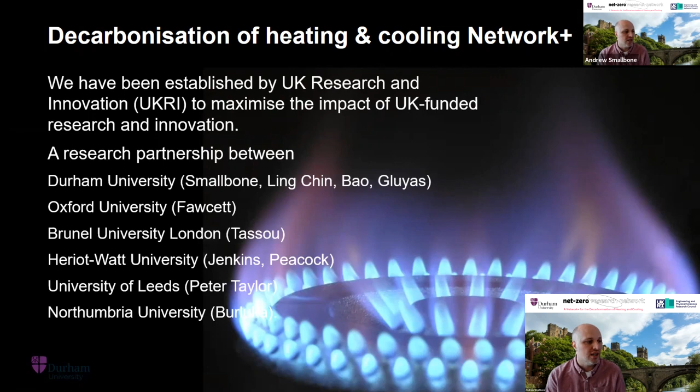Okay, so this Network Plus is a partnership which has been established across Durham, Oxford, Brunel, Heriot-Watt, Leeds and Northumbria. And we were established initially with these set of partners, but this is just how we've started. We built on top of a pre-existing thermal energy network and are planning to continue to grow this and bring more people on board as partners.

It's got key objectives for the network. The first one is to grow a world-leading research network around the topic of thermal energy, so that we can all communicate together and let each other know what's happening. This is obviously a very timely topic at the moment. It's a big challenge. It's going to cut across residential, business, industry. It's going to be net zero relevant. So of course, lots of opportunities to be involved in a network which is going to be rapidly changing.

The plan is to try and bring together lots of the different stakeholders across the technology, across end users and social scientists and policymakers. And we plan to do that through sandpits, workshops, the possibility of doing secondments, research studies and public engagement. And then of course, the key is to try and get people from each one of those sectors to work together on different key cross-cutting challenges, and we'll try and do that through some of our flexibility funding, which we will announce how to get hold of in the near term.

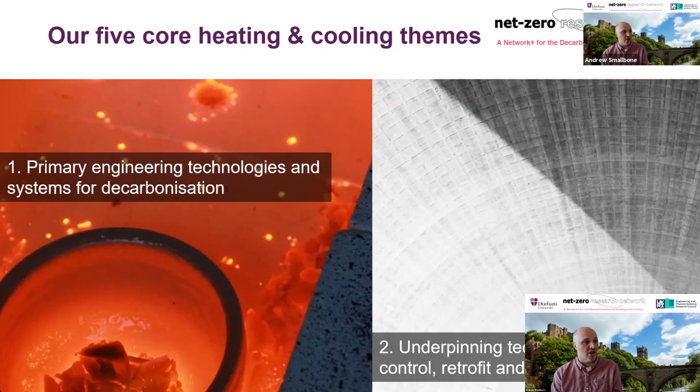We have set aside 5 core themes that the network works around. The first is about the core technologies that deliver heating and cooling, your heat pumps, etc., or gas boilers, and the key technologies and their surrounding systems for decarbonisation. And then number 2 there is the actual underpinning technologies, materials, control, retrofit, and infrastructure. So that would be potentially the equipment or the materials that underpin the primary energy technologies.

At a high level, we've got what's happening with the wider energy system. Obviously, that's got a key element related to economics. So economics is obviously a key part of that too. And then 4 and 5 there show the relation of the technology back to people, and how do you shape the future world in a policy and a leadership setting in order that we can transition to net zero with as little pain as possible.

In terms of the practical element of the Network Plus, we're planning to have activity around 4 key areas. The first one is co-organized events, and that's one of these events right now. And we plan to have many of these over the 4 years. We've been doing most of them online to date, but hopefully transitioning to real world in the near term.

We have a budget for secondments, so taking an academic and getting them to work in industry for a while to solve problems in and around this challenge, and also travel bursaries to support early career researchers to travel to our events and activities. And as I mentioned, we've got some budget for multidisciplinary research feasibility projects.

And there's also a role in and around roadmap development to try and explain what the key technologies in this sector are and how they are evolving, and to try and communicate that to a wider audience who are now taking an increasing interest in this particular area.

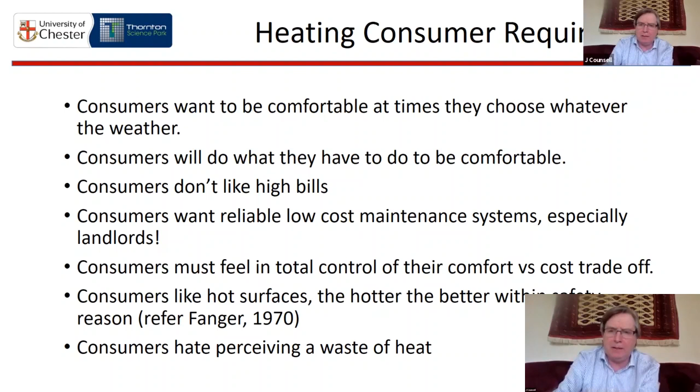Whatever we say or whatever we try to tell consumers that it's more efficient to sometimes waste heat, they'll never believe you. So consumers are not that stupid. I've listened to government talks over the years, listening to politicians saying if only the public was more sensible and would listen to the advice we give them, they would change from their gas boilers. But actually, that's not the case. Because consumers are very much focused on energy efficiency. And consumers have actually increased their household efficiency overall from 79% to 84% in the last 7 or 8 years just by switching to LED lighting.

So they're not so crazy. And as Margaret Thatcher famously said, you cannot buck the market. The market isn't so stupid. However, what is the elephant in the room?

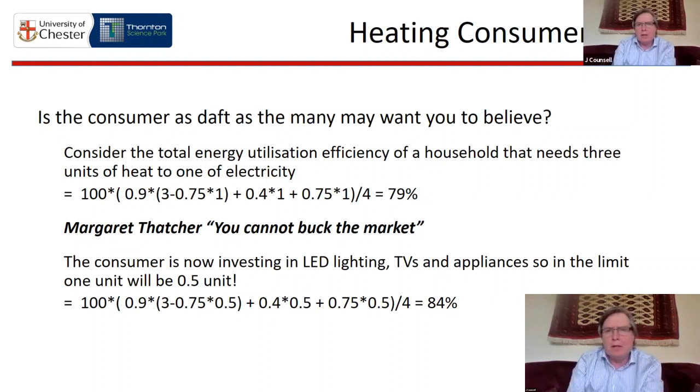But the elephant in the room is that things are changing. And really what's happening is, as we've reduced electricity demand by nearly 30% off the national grid, and we've introduced more renewables in wind and PV, then the carbon intensity of the grid has reduced quite significantly in the last 10 years.

And we've reached a point where the carbon intensity of the electricity grid is virtually the same as the carbon intensity of a gas condensing boiler. So it was once carbon efficient to switch an incandescent light bulb over into an LED light bulb. And we did this by once putting typically 60 watts into the incandescent and getting 59 watts of heat out. And that 59 watts of heat was 59 watts of heat that you didn't need to find from your gas boiler. Now we only get 3 watts.

So we now need to find all that heat. Typically, we need to find 56 watts extra heat from the gas boiler. But the gas boiler is no more carbon intensive than the electricity. So actually, putting in LED light bulbs now is a bad thing for carbon. And that's all happened in 10 years. So you can see what I mean when I say the world is getting very complicated. We don't really know which way to turn.

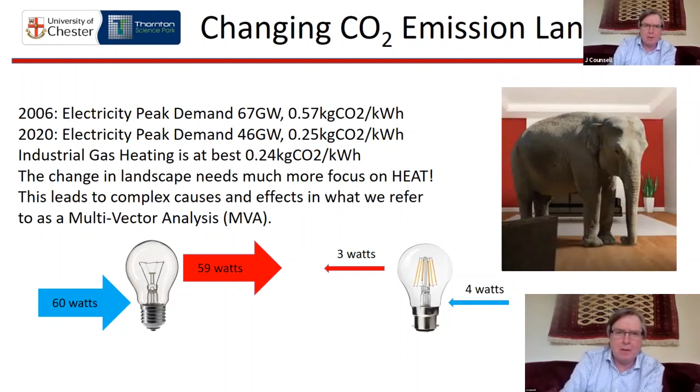What are we seeing right now in solutions? Well, for low carbon solutions, we're seeing a drive to switch gas boilers, condensing boilers, over to a mix of hydrogen. And we think we will see a big push from the gas boilers for that. Electric storage heaters. Well, if you talk to the government, they will tell you they're terrible things. That's because most of the people that are advising them are even older than me and remember the early 1970s storage heaters, which were terrible things.

But new storage heaters, high retention insulation using space shuttle type insulation, are incredibly controllable devices, and their ability to store low carbon heat in off-peak times shouldn't be underestimated in a demand-side response world as we go forward. Direct electric heaters, they're not going anywhere.

You know, if you go to a SAP 10.1 calculation, which is the latest new building regs, and you put in a 1 and 2 bedroom flat, the highest levels of insulation, your energy consumption from your domestic hot water is nearly twice that of your space heating. So are you going to really spend £10,000 on a heat pump when really you're using very little heat? So direct electric is going to stay with us.

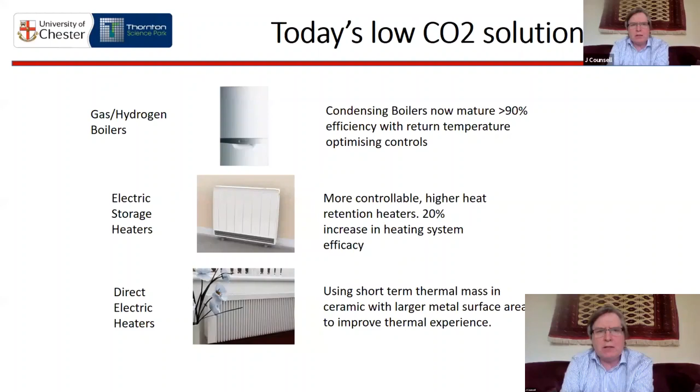We're also seeing emerging, well, micro CHP is not emerging. The late Ray Winstanley introduced micro CHP into the UK in 1989, and I joined him in 1992 with the Swedish in Malmo to look at the first engine that we were going to bring to the UK. That's now the Whispergen type technology, and also organic Rankine cycles have been developed. Perhaps moving over to hydrogen with micro CHP will bring a technology to be reborn.

We're seeing fuel cells. Fuel cells, again, are not really a new technology, but hydrogen fuel cells, natural gas fuel cells are still being developed by many universities, and we're very well aware of Imperial's activities in that, as I think they were one of the most successful impact stories in the last REF round.

And of course, finally, our beloved heat pumps. Heat pumps have been with us since the 1950s. Jack Sivier, who worked for me at EA Technology, carried out the first heat pump trial in the UK that I'm aware of in 1987. We carried out the largest heat pump trial until recent years in 1995, and there were significant problems with heat pumps. Some have been overcome and some haven't.

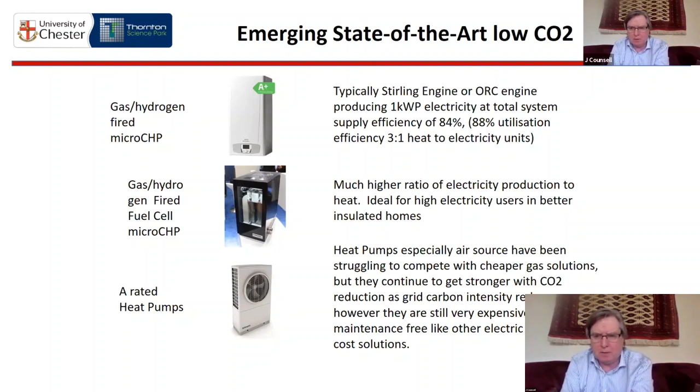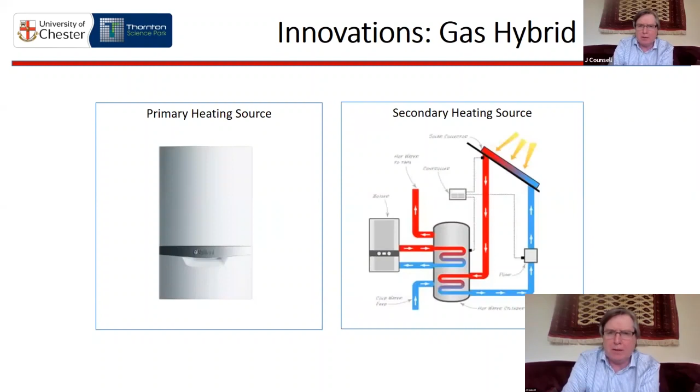So innovations I'm seeing now, what's happening now is the word hybrid. We've got hybrid vehicles, now we've got hybrid cars. So what we're now going to see is more and more hybrid heating. So we're going to see solar heating added to gas condensing boilers, possibly with hydrogen. We're going to see gas boilers integrated into heat pumps. Vaillant has already done this. It's been tested at BRE. I saw that about 18 months ago.

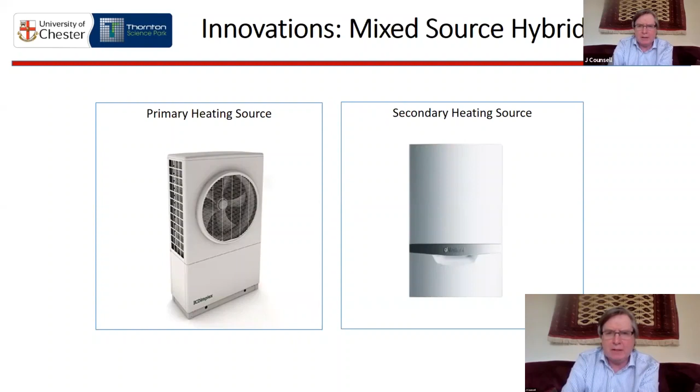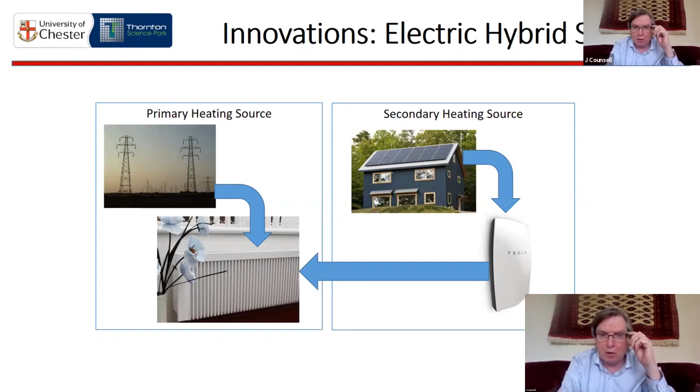Ourselves and Yusuf, Dr. Khalid and myself, we worked with BRE, Glen Dimplex, to develop a different type of hybrid system where we took the principle of the GEC Night Store, a dirty great big storage heater which could heat hot water that was used in the 1970s, and made a micro version which we called the quantum boiler.

Working with the domestic hot water tank, we were able to create a system we called RISE, which allowed us to control heat pumps and off-peak storage, thermal storage, to mix and match to try and meet the multi-objectives of thermal comfort and carbon minimization. Very challenging problem is trying to meet two objectives at once.

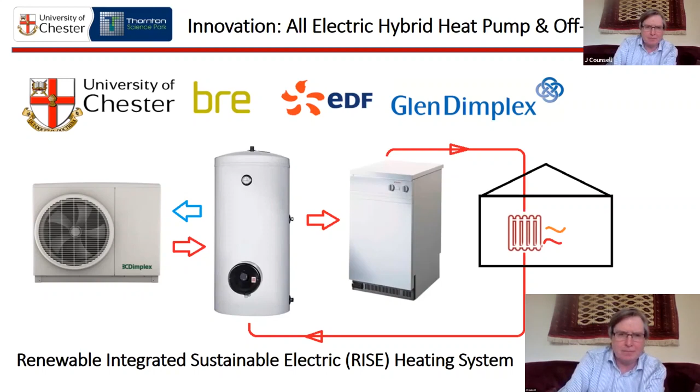So the complexity of all these systems, which is best? Well, it depends on your metric. This week, Boris wants to save the planet. Next week, he might want to save pensioners. I don't know. It's anybody's guess. So the metrics are changing all the time.

Part L building regulations, the metric there is actually primary energy. Some of you may not have heard of that. Primary energy is what has been proposed for Part L building regulations, but it's been in consultation for nearly 6 years and it's not decided yet. So you can see that we've got some major problems trying to decide what's most important. People's lives or carbon dioxide. How do we meet those two challenges?

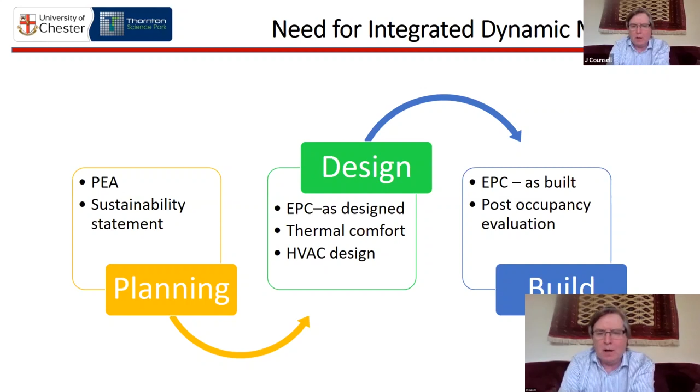So from my point of view, we need a way to model and evaluate the true performance of real systems. And that's what we've been doing at Chester, carrying on from our work IDEAS that we did at Strathclyde. I worked with Brian Anderson, the inventor of SAP Part L building regs, who sadly passed away a couple of years ago. And we calibrated our dynamic model with SAP, and we've recently expanded it in its thoroughness to include non-linearity and all the complexities of real non-linear behavior in the thermodynamics of a home.

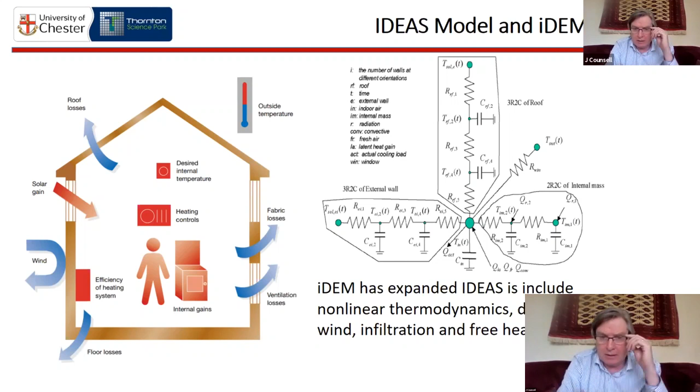And you can see that if you're ever going to try and calibrate a model with building regulations, statistical data, remember, it's not just about energy. You also have to calibrate temperature. And that temperature is not an air temperature, it's a thermal comfort temperature.

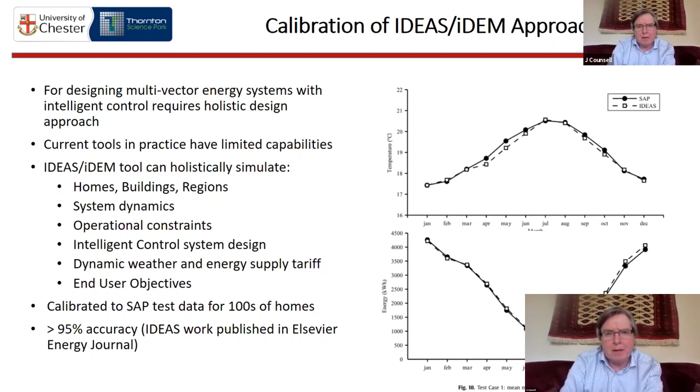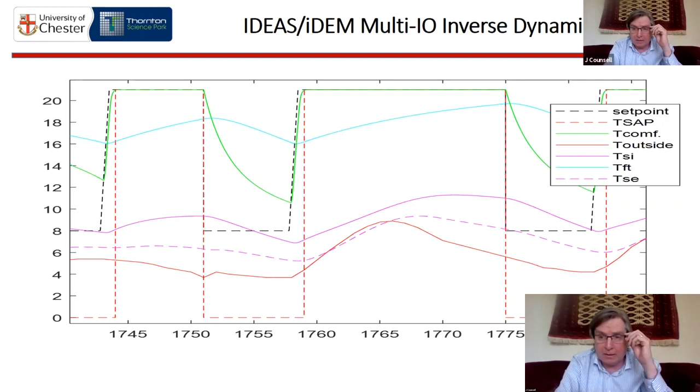We've also introduced dynamic carbon. It's very important that you look at the true carbon intensity of your solution. There's no point using an average carbon for winter analysis, because on the national grid, the carbon intensity is much higher in the winter than it is in the summer.

So if you're going to use a heat pump for space heating and you're going to use an average carbon intensity, well, frankly speaking, you're cheating because you're benefiting from a low carbon intensity in the summer when you're not using it. If you're using it for domestic hot water, it's probably not too bad. But space heating carbon savings from heat pumps, when I see them, they're usually very wrong.

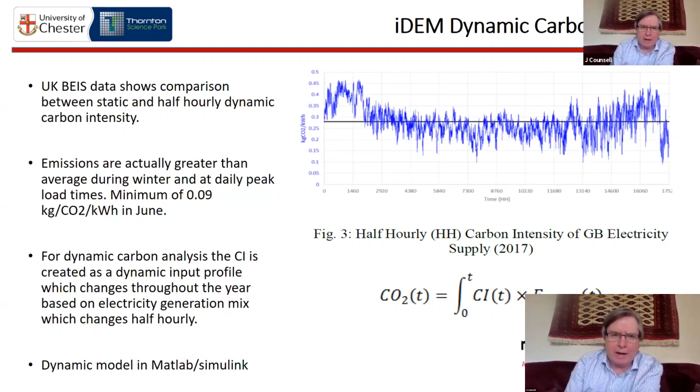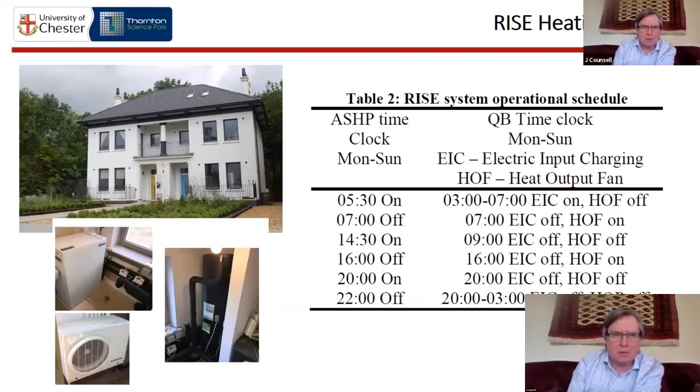We tested a RISE system in the Prince's Trust House at BRE. These were typically our modelling results. We could compare the dynamic temperature response for an air source heat pump in the winter and the summer by validating the model. Our RISE system wasn't very good. Our storage system hadn't got the capacity to maintain comfort.

It also wasn't so good at controlling the temperature in the summer, because thermal storage in the summer and shoulder months causes problems. The air source heat pump, however, isn't that good either compared to a gas boiler. That's something else we learned.

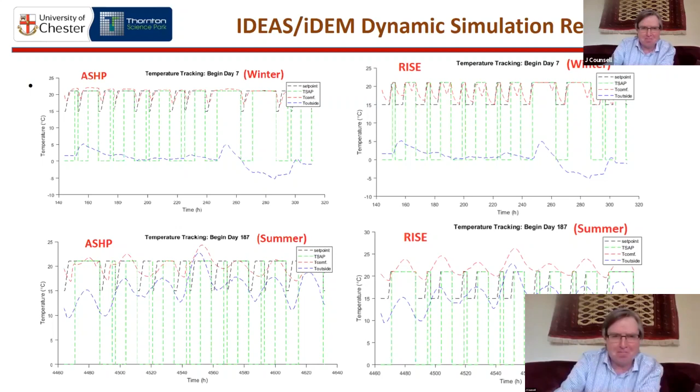What's very important when you're doing these analyses is you look for the truth. And if you do a dynamic carbon analysis, you can see that with an air source heat pump, there's a 17% difference in the carbon emissions with space heating from using a true dynamic carbon analysis compared to doing a static one. And you need a dynamic model to be able to work that out. So there's a few conclusions you can read there later.

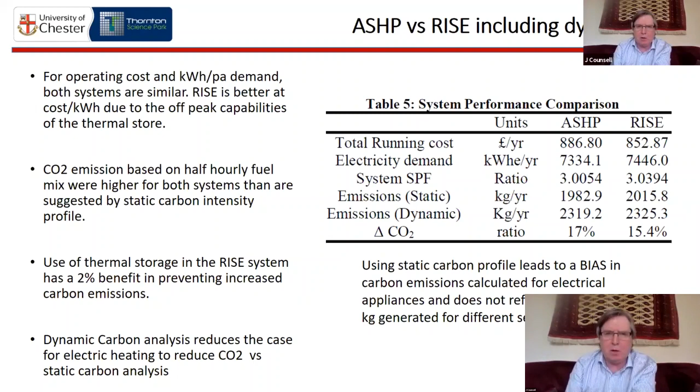So in summary, we're living in a world of complexity, serious complexity. We need a modeling method to be able to understand what metrics are best and how best to meet them. There's no silver bullet in getting towards zero carbon heating. There are likely to be different sectors with different solutions. Hybrid is the new word, and we're going to see more and more hybrid systems.

But I feel that what we'll see is more zoning. We won't see fully integrated systems. We might see upstairs, downstairs solutions, different solutions for domestic hot water and different solutions for space heating. One of our greatest and single biggest challenges is that within the last few years, the rule of thumb that gas is 3 times cheaper than electricity has been broken. Currently, electricity is nearly 5 times the price of gas.

I wonder where this is going to stop. Are we going to end up with 6 to 7 times the price of gas for electricity, in which case any chance of electric heating in our society is dead, well and truly dead? There is no way that we will be able to put so many people into fuel poverty. We will be taking ourselves back to the 1970s, where there were as many people dying and suffering from fuel poverty as they are from COVID-19 today.

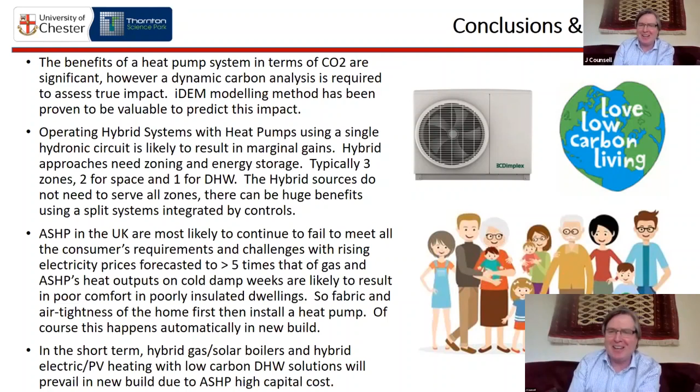Sorry, Andy, I rushed through there. I have a lot to say, and hopefully I've not overrun too much. Thank you very much. Thank you, John. No, we're okay. So thanks so much, John. I think John will now stick around for a while.

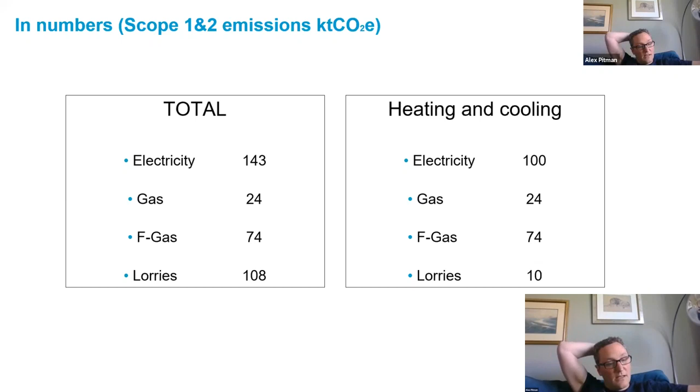So like I said, we spend a lot of money on all this stuff. And of our carbon emissions, most of it is electricity and gas. And then in common with lots of retailers, a surprising amount is actually leakage of refrigerants. So our F-gas emissions are a pretty scary number. So the numbers on the left are our total scope 1 and 2 emissions for last year.

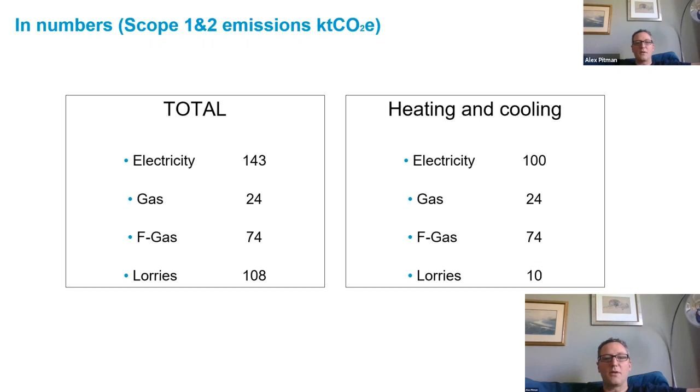And then of that, heating and cooling, of which fridges is the biggest element for us, is some pretty big numbers. And of course, we're keeping stuff cold on lorries as well as driving them around. So that's the sort of scale of the problem for us as a retailer. And it's fairly similar numbers across all the big food retailers in the country. It's a little bit different for the non-food retailers, but heating and cooling is a big thing for us, particularly as we've all set net zero targets.

So as an industry, we've come together, British Retail Consortium, and all signed up to net zero targets by 2040. All retailers have got individual targets and individual roadmaps to get there, but we're all heading towards a flavour of zero carbon. Lots of work going on across the industry on defining the different flavours of zero, but as a direction, that's where we're all trying to get to. And it's what our consumers and customers and other stakeholders are asking for.

So in the Co-op's case, because we're a democratic organisation, we have a motion every year at the AGM about going faster on climate change. So that's where we're all trying to get to. So key challenges: I already mentioned the F-gases is an enormous number, and we're moving towards that, partly driven by legislation. We're on a journey that's going to get rid of F-gases. And if we combine that with good renewable power, then we're moving towards a lower carbon solution on lots of our cooling. There's lots more we could do.

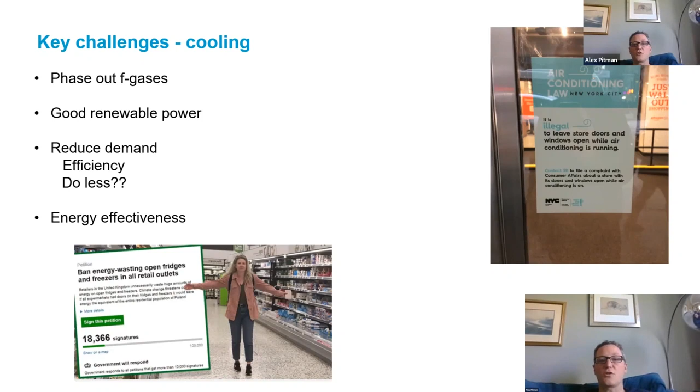And then energy effectiveness is our term for energy efficiency, sort of using less, but also using it at the right time. So building on some of those earlier slides around carbon intensity, being smart about when we're using energy is quite important. So big picture there, some of the key things on cooling. And then on heating, basically around getting rid of gas. I was saying earlier, what are our options around heat pumps.

With all the different zero carbon standards, we're trying to understand exactly how fast we need to get rid of gas and what's the role of offsetting and all of those things. But basically, we're on a trajectory where most retailers are trying to get rid of gas, which leads us to heat pumps as an absolutely key technology. And we've been doing these for a number of years, and it's complicated exactly how to deploy this in sites with lots of fridges. But basically, we're finding if we get the building insulation right, we're reducing the demand, and as I mentioned earlier, the coefficient of performance versus electricity price is an absolutely key ratio for us.

What we've learned is when we do the analysis of energy prices against coefficient of performance, the key thing is exactly when we're using it in the time of day, because electricity prices are quite complex things. So if we can add a little bit of storage, just within-day storage, and use electricity at the right time, it has big implications. So we're doing some work on the energy retailing side of our business and trying to get the right smart tariffs to help people. The other option, which was mentioned earlier as well, is hydrogen.

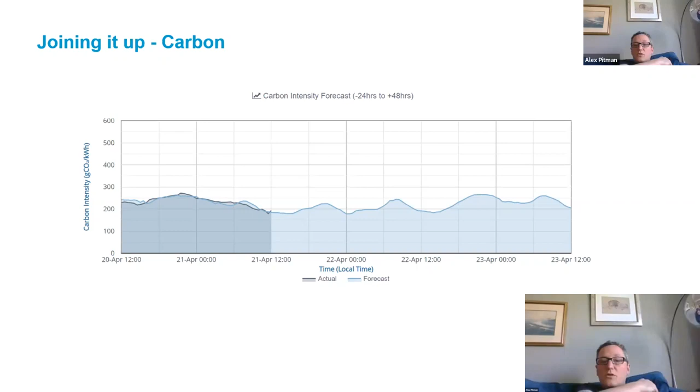So, as rightly mentioned, the carbon intensity differs between seasons and is also very different within days. So this is this week's carbon intensity and the carbon forecast. And we've seen some really low carbon figures, like over Easter, when industrial demand drops off and it was sunny and windy, but then it shoots up at other times. As we can see this a few days ahead, being able to plan when we use electricity at which carbon intensity gives smart opportunities there.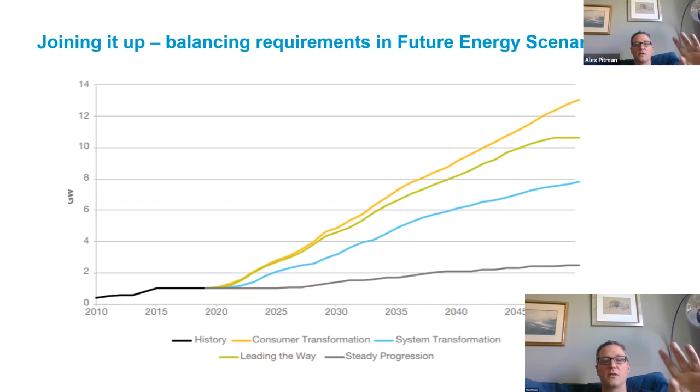And then if we look at how this works on a grid level, not only does it have carbon impacts, but balancing requirements. So if someone in National Grid says, help, what can we do at local level to do the demand side response? So most retailers are doing something on large sites like cold storage and big distribution centres, and maybe data centres where they've got generators. The markets are changing quite rapidly there. Relatively few have deployed this at smaller store level, but this area is going to grow rapidly. So as well as the carbon intensity, there's a balancing requirement, and then there's a commercial imperative as well.

So with this imbalance of the grid coming along, we can see the amount of time when electricity is going to be really expensive or basically free is increasing all the time as well. And I think we've seen some of these trends in other energy markets around Europe where they've got more renewables. So this is quite an important angle as well. So the value of flexibility in pound notes looks like it's increasing.

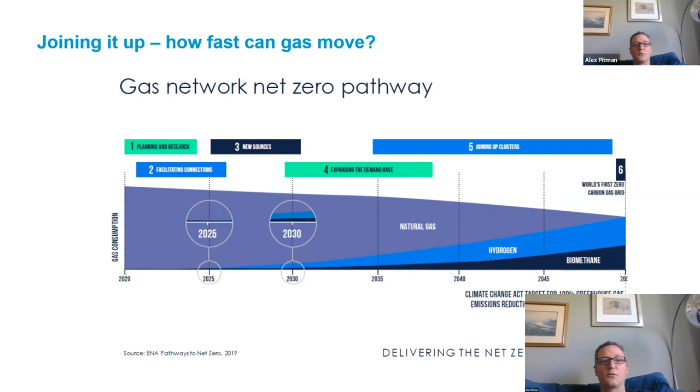And then also from modelling work of green hydrogen, quite an intriguing idea, is that going to play a part in balancing the grid, and how does all that work in the future? But most of the forecasts I've seen say green hydrogen is going to be a relatively small part of the grid. So there are some retailers who are interested in whether we could get the nice green hydrogen and use that in our mix. But it's relatively small numbers, even at the end in quite a few years.

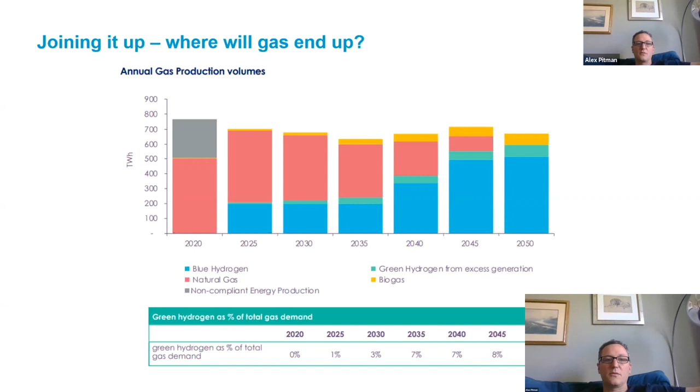So joining those four graphs up, really, we think one of the key opportunities is doing something smart with heat pumps quite quickly. So if we can combine reducing demand with the right phasing and storage solutions, have a heat pump with no HFCs, stick some good quality renewables in it, so you're paying the right sort of prices, and make it upgradable so we can do new things. We've got other things we want to do with the supply capacity as well. So most retail sites will be trying to get an electric vehicle strategy in there as well. Something that joins together all these electrical capacity requirements at building level is going to be part of our challenge.

So I think we've got nearly all the bits of the jigsaw there, and commercially it's starting to make sense. It's not simple yet and completely packaged in exactly the right way. So we're going to need some more innovation and joining up. But I think that's a key opportunity for the sector.

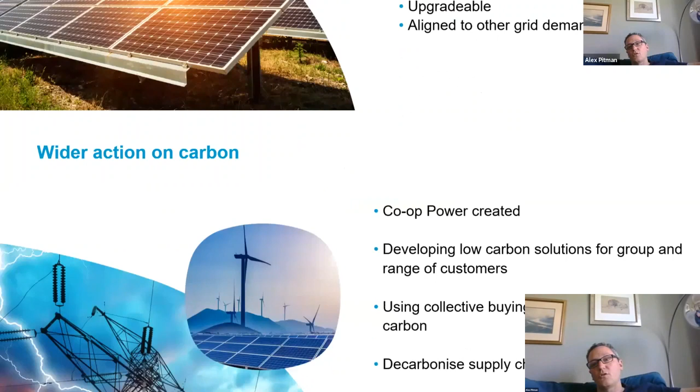And then beyond that, really, we need to do some wider action on carbon, which is part of the reason Co-op Power was created. So we're working with all these partners to try and come up with more low carbon solutions, do collective action and buy things together. We've started to push targets down the Co-op supply chain, as many other retailers have. So we're setting carbon targets for people supplying us. And then we just need to work with more partners to drive some innovation and change. That was it for me.